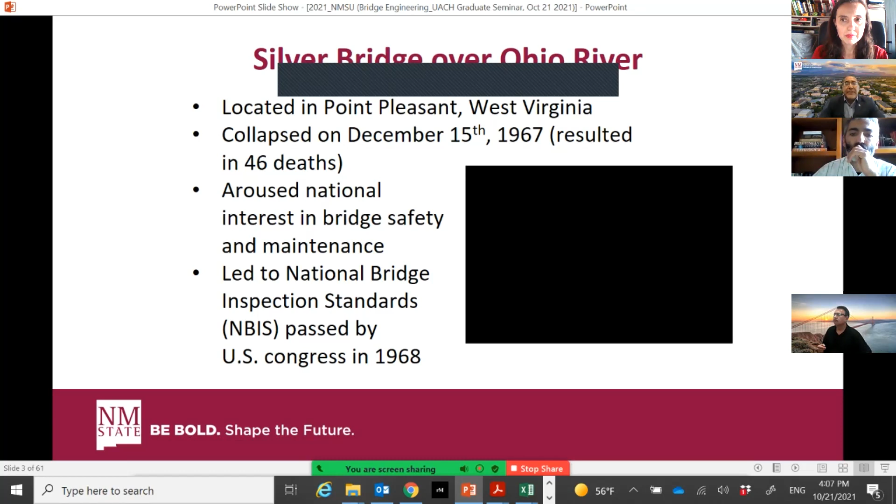To get things going, I want to first tell you New Mexico State University has been involved with bridge engineering for many years. It actually started in the late 1960s and early 1970s. My mentor was actually Dr. Kenneth White, and Kenneth White came to New Mexico State University at about the same time there was a significant bridge failure. This was in West Virginia, the Silver Bridge over the Ohio River. To let you see what happened during this particular failure, I'm going to show a short video. So let me go ahead and show that.

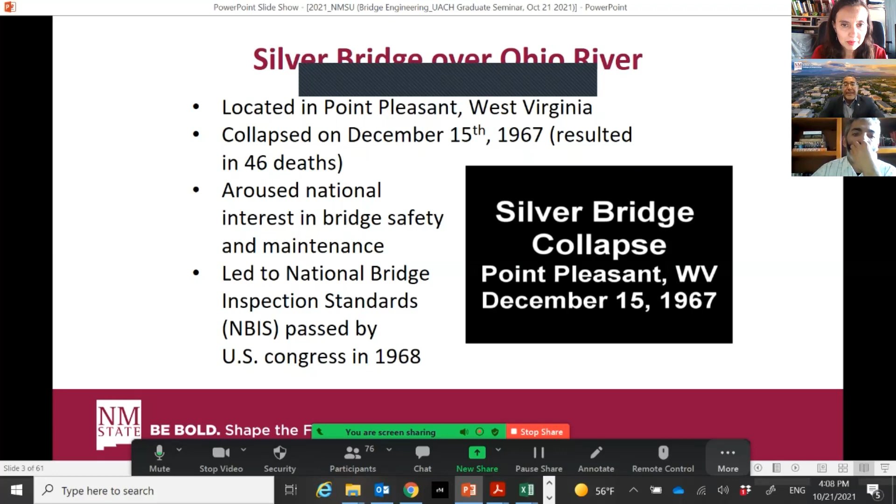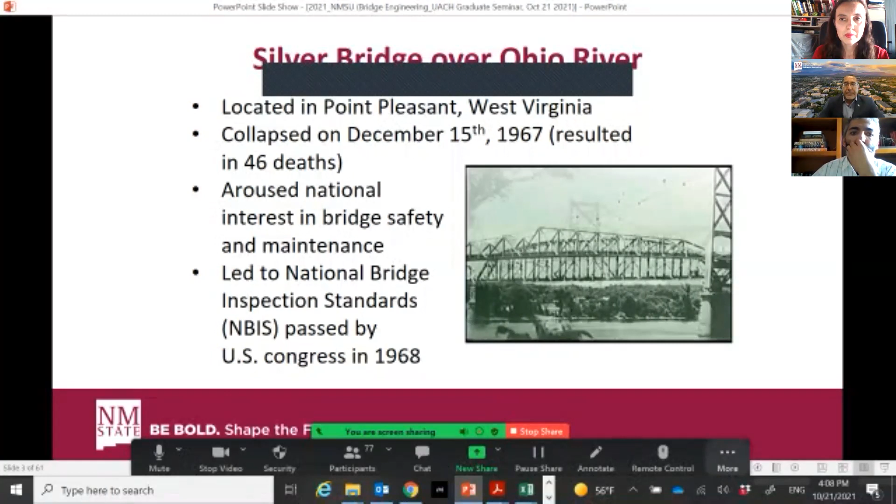The road hung from a simple, elegant chain design made possible by a new type of high-carbon, high-strength steel. It made quite an impression and was known as the Silver Bridge.

If the weight of traffic had been the culprit, the long, thin shank would have broken, not the circle of the eye-bar where the steel was at its thickest. So if the eye-bar was broken just from excessive...

The bridge was falling toward me like dominoes. And by the time my car did stop, my wheels was just right on the...

31 cars and trucks fell into the river. Charlene's car hung precariously on what remained of the bridge. It was the worst road bridge disaster in U.S. history. Across the Ohio, near the town of Point Pleasant, they say, with a heavy load of traffic, it began to swing and sway. It had been photographed as they took it out.

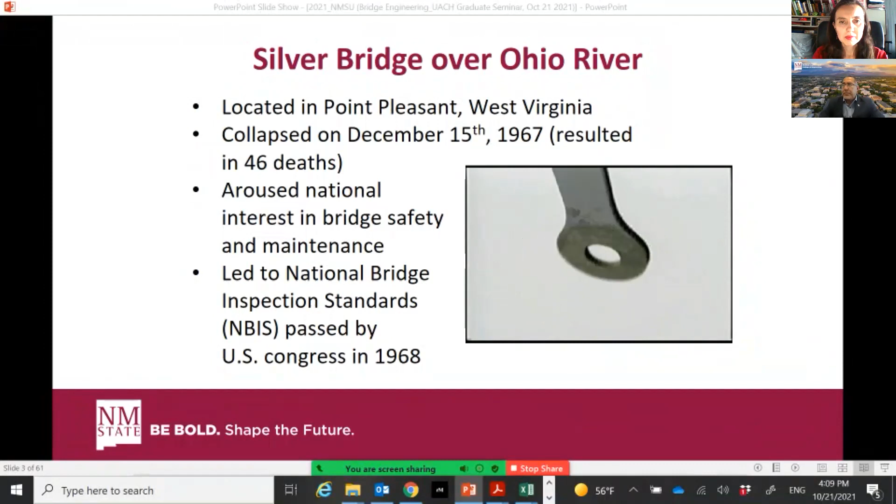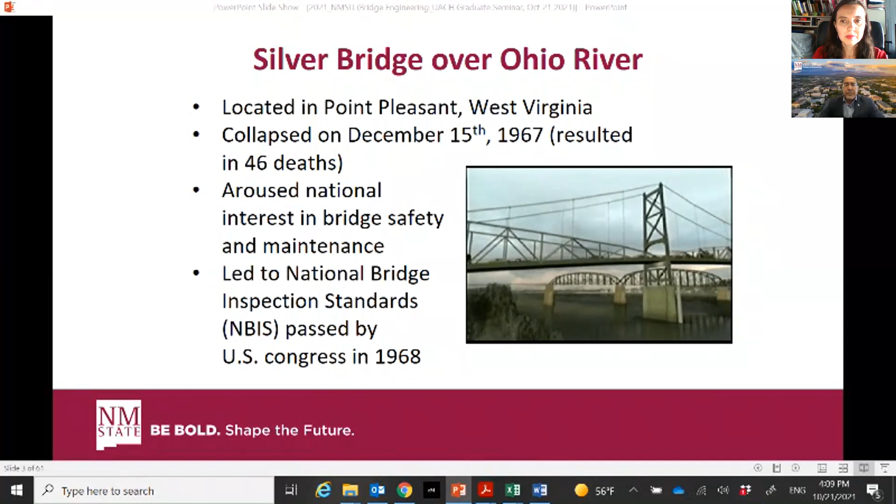This is the broken eye-bar. Each eye-bar was a link in a kind of giant bicycle chain. The massive linking circles were at either end of 50-foot-long shanks that held up the bridge, but the tiny, undetected crack caused a single link to fail. When the chain on one side of the bridge snapped, the other chain could not take the weight of the bridge, and down it went.

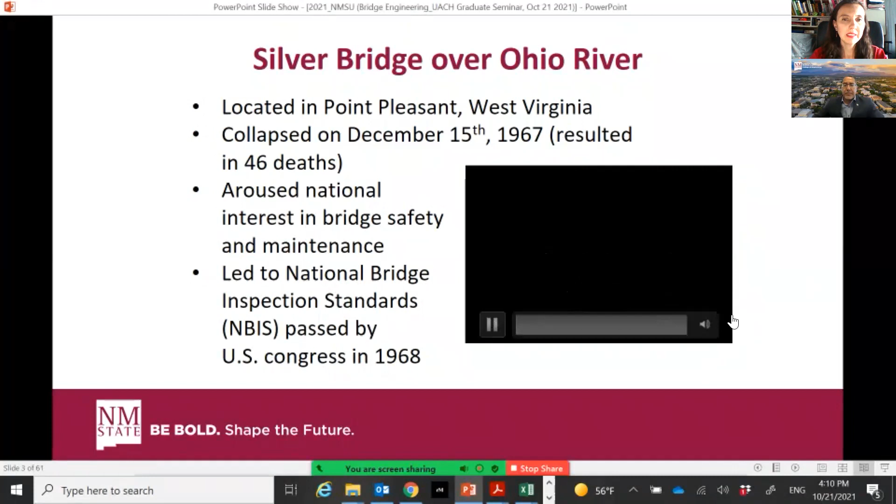Okay, so that was a video of the Silver Bridge over the Ohio River, and you could see that it resulted in 46 people losing their lives. And because of this failure, in the U.S., they started the National Bridge Inspection Standards, which are related to safety and maintenance of bridges.

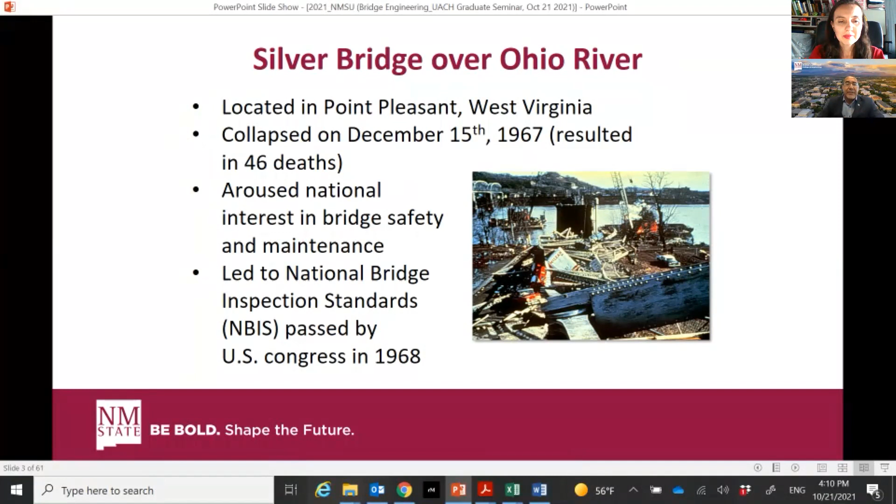So once this started, New Mexico State University began working with the New Mexico Department of Transportation, and now we are a university that actually conducts bridge inspections for the state of New Mexico, which is a very unique program because we hire four undergraduate students every six months, and they're the ones that actually help with the inspections.

So it's only one of its kind in the US, and it provides experiential learning co-op experiences for our students.

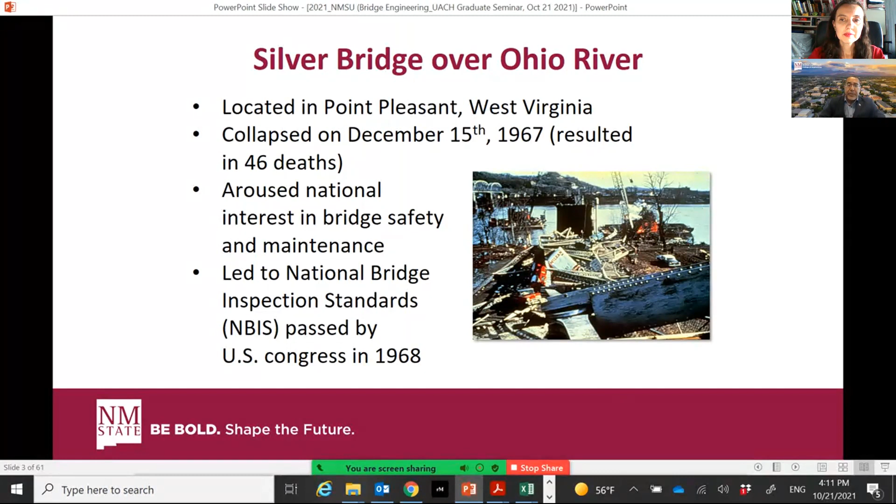A couple of other failures I wanted to talk about: there was the Sunshine Skyway Bridge in Florida in 1980. That bridge failed due to pier protection — the bridge was hit by a barge.

Then we had the Mianus River Bridge in 1983 in Connecticut. This was a fracture critical bridge, in which, much like the Silver Bridge, if one of the components happens to fail, the whole bridge will collapse.

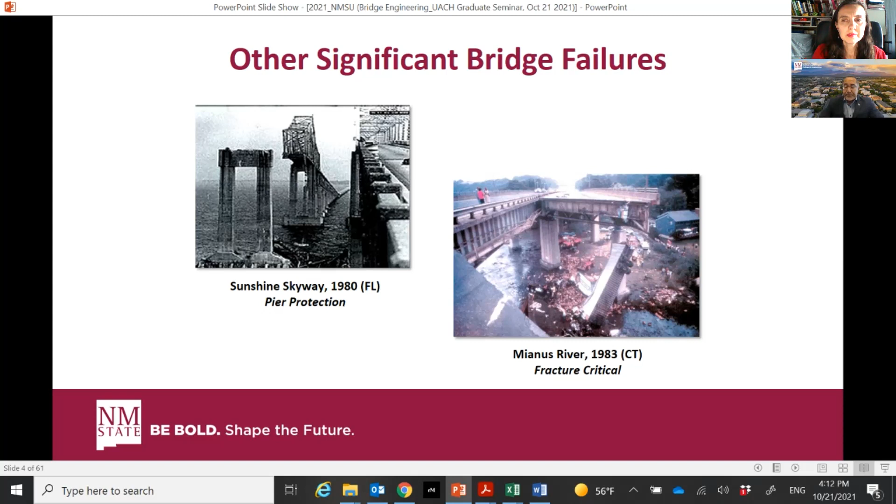We also had the Schoharie Creek Bridge in 1987 in New York. This bridge failed due to scour and undermining — this is where water gets under the structure and starts to remove the soil from underneath the piers and the abutments. This is a very common problem in areas where there's a lot of rainfall and flooding.

And then most recently, we had the I-35W interstate failure. This was in Minnesota in 2007, and this particular bridge failed because of the condition of the gusset plates. So all the different provisions from the US have changed because of these failures.

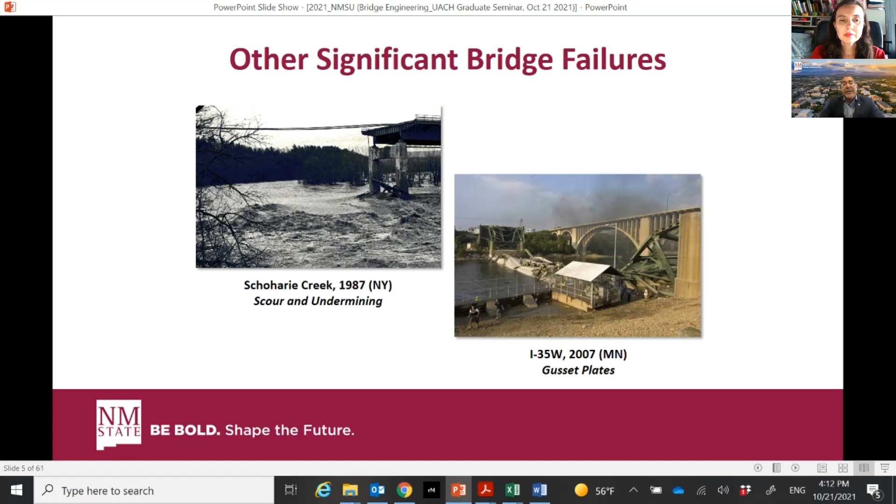This gives you a progression of all these bridge failures, starting off on the Silver Bridge, moving on to the Mianus River, I-35W. And then in 2013, there was a bridge that failed in Washington over the Skagit River, and that was because a vehicle hit the bridge — it hit a truss bridge and the bridge collapsed.

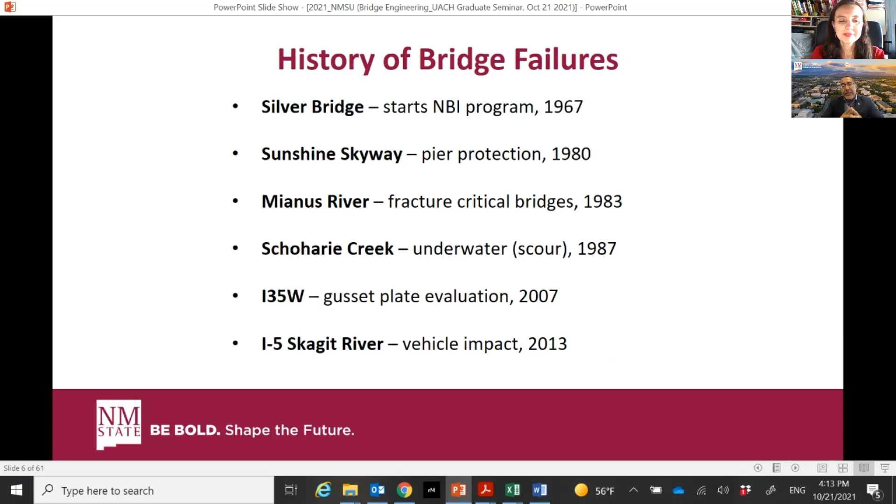So anyways, I like to give that introduction because our work at New Mexico State University focuses on inspection and evaluation of infrastructure. We do a little bit of design and new construction, but a lot of our research has to do with evaluation. So what I just talked about here is the inspection and rating of highway bridges.

Like I said, we've been doing this since 1967. We also move into the area of higher level evaluation of reinforced concrete slab, steel girder, and pre-stressed concrete girder bridges. What I mean by higher level evaluation is we're looking at three-dimensional modeling and also load testing of bridges, which I will talk about in more detail here in a few minutes.

We also have projects related to the retrofit of bridges using carbon fiber reinforced polymer materials, load rating and fatigue evaluation of railroad bridges, and riveted connections of steel arches.

This is a project that we did for the Los Alamos National Laboratory, located in Los Alamos, which connects the city of Los Alamos to the lab.

Another area is ultra high performance concrete for pre-stressed concrete bridge applications. We've been looking at concrete strengths ranging from a typical concrete strength of about 10,000 pounds per square inch, while the concrete we're producing at New Mexico State is double that, around 20,000 pounds per square inch. That's the material we're using for bridge beams, and we're also using that material for overlays of bridge decks.

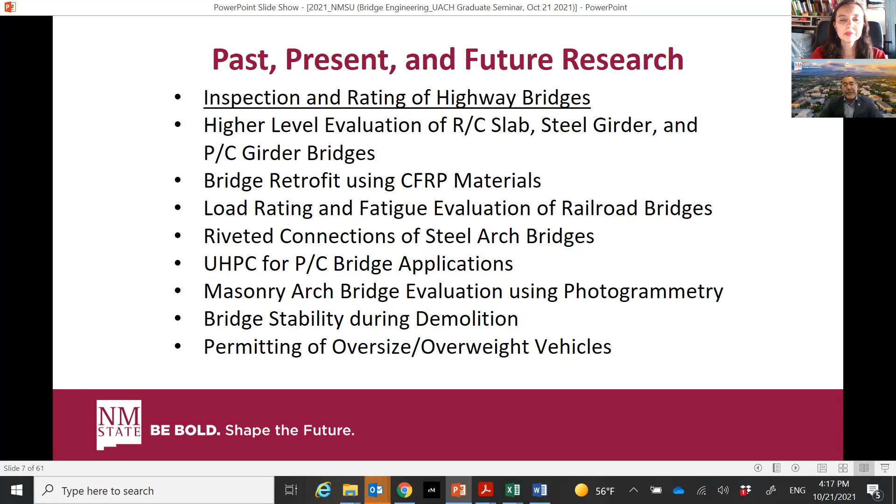We're coming up with a fee structure. We will need to charge these vehicles so that we could basically retrofit, rehab, or replace bridges in the New Mexico area.

So let me briefly talk about the bridge inspection program. I'm the PI for this project, as I mentioned. We have a program coordinator, two team leaders, and four co-op students that participate every six months. So over a given year, we have eight students that participate.

I like to mention this program because if you're a student from the University of Chihuahua and you happen to come to NMSU, you can participate. In fact, I have a couple of people interested right now, and you would be hired for six months and be able to get some experience, which would be very useful for future employment.

We inspect about 400 bridges every year, including fracture critical bridges, such as the one you saw in terms of the collapse. Right here you can see the Taos Gorge Bridge. We inspect that bridge every 2 years, and we just finished inspecting it. It's 600 feet above the ground level, which is very high, and it requires that we use climbers. We have an underbridge access unit, and you can see people here inspecting the structure and getting ready to go down underneath it.

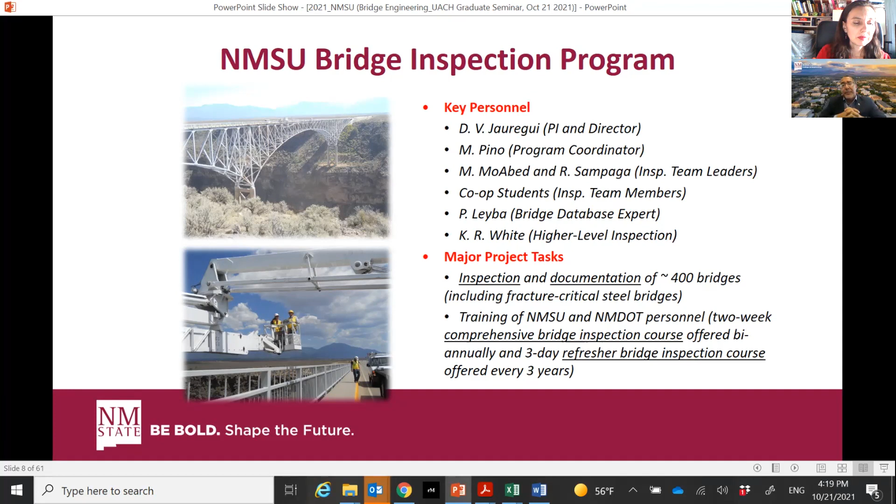To give you an idea of the bridge inspection side, we look at each bridge component and assign a condition state. Condition state 1 is good, 2 is fair, 3 is poor, and 4 is severe. Our students and engineers go to all bridges and collect this information. The New Mexico DOT uses it to plan their funding—for example, if a bridge component has a lot of area in condition state 4, they would decide to replace the bridge deck.

We have to inspect bridges every 2 years, so each one of our bridges is inspected on that cycle. This area of work is very much related to forensic engineering, where you're evaluating infrastructure and making sure it's safe for the public.

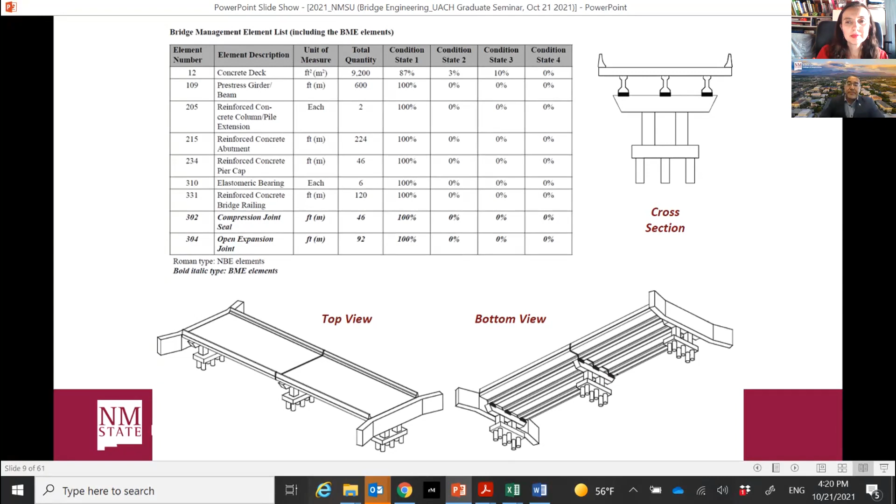The next area I'm going to talk about is our bridge evaluation program. It essentially involves coming up with a capacity of infrastructure, so we could set limits in terms of how large the loads can be that go over our bridges. The one I want to talk about today is called the load rating of pre-stressed concrete bridges without plans, and it involved load testing and non-destructive material evaluation. I'm going to focus on pre-stressed concrete bridges, but we also did reinforced concrete, steel, and timber bridges, including field visits and as-built plan development.

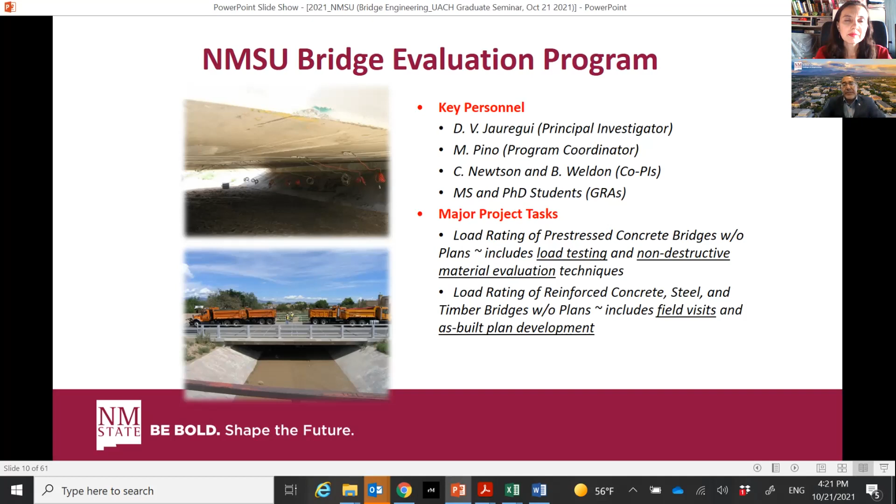The bridge testing equipment we use, these are sensors that we attach onto the girders. This is a product we've been using for many years, a structural testing system provided by a company called Bridge Diagnostics Incorporated, and we work very closely with them. One of the recent articles that came out has been related to this particular project.

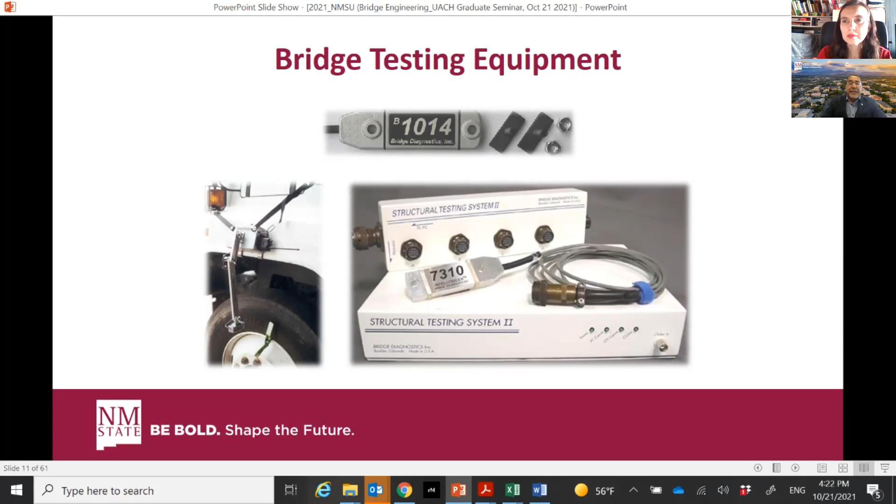So let's go ahead and get into that project. This is going to be the evaluation of pre-stressed concrete bridges without plans—evaluación de puentes preforzado sin planos.

Let me talk about the introduction. Right now in New Mexico, bridges without design plans are a major issue. Approximately 10% of bridges do not have design plans. In the US, there are over 600,000 bridges throughout the whole country, so of those 600,000, 60,000 do not have plans. It's very difficult to determine the capacity.

Many of these bridges are older, what's called off-system—they're not on the interstate. They're owned by a city or a county, and the bridge plans have just disappeared. This is a challenge: how do we determine the capacity? We can't do an analysis because we don't know the concrete strength, we don't know the rebar, there's a lot of things we don't know. So we did this project for the New Mexico DOT to come up with a plan so they can evaluate these types of bridges.

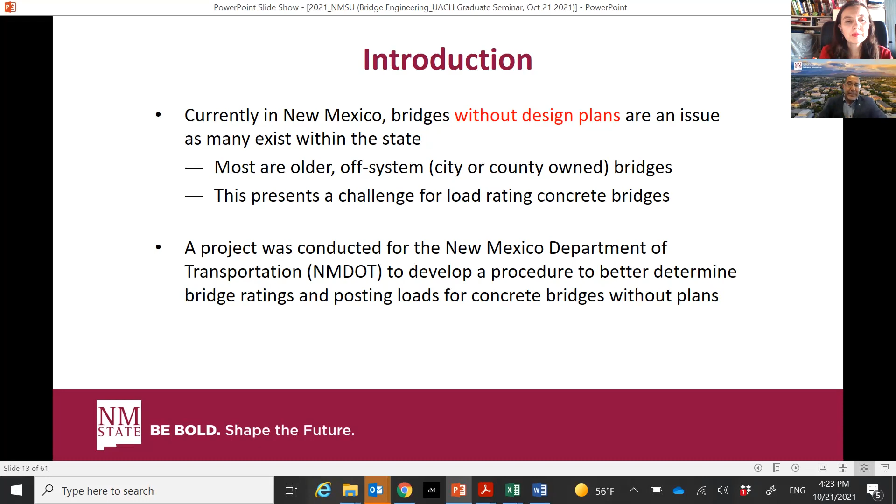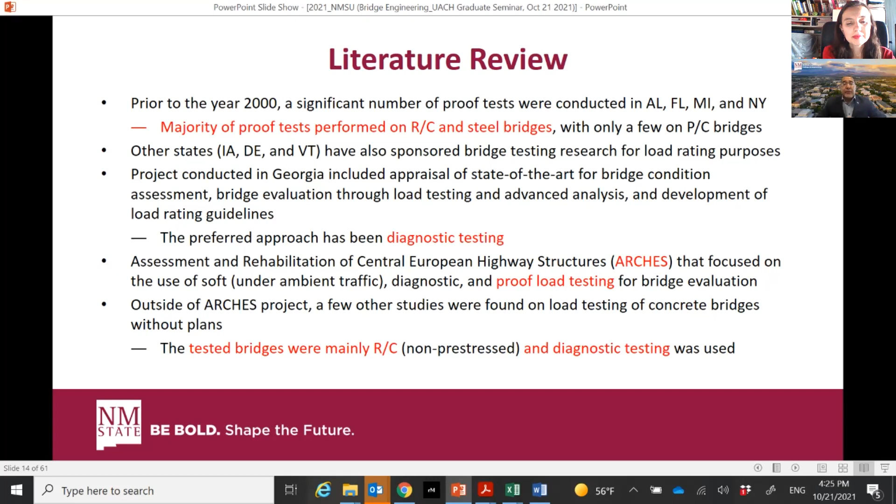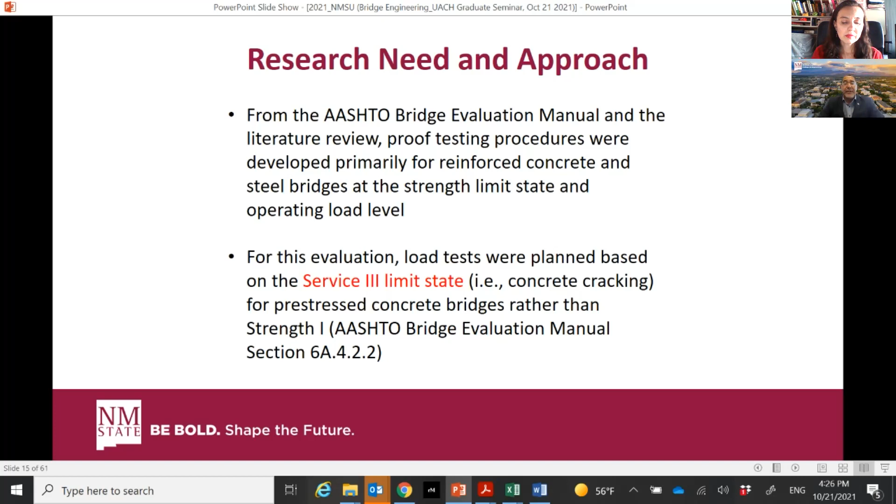And we're going to be looking at Service 3 limit state. This relates to concrete cracking, as opposed to using the Strength 1 limit state. So we're going to be looking at Service 3.

So once again, we don't know what the strength is of the concrete. We don't know if there's rebar, we don't know if there's pre-stressing strand. All of that is unknown information.

And these bridges are very common in Las Cruces because there's a lot of agriculture. So in order to get over some of the channels, what they'll do is go find some old beams and just span it over the channel - they won't even really design the bridge. It's just old beams they're trying to salvage and use as a bridge.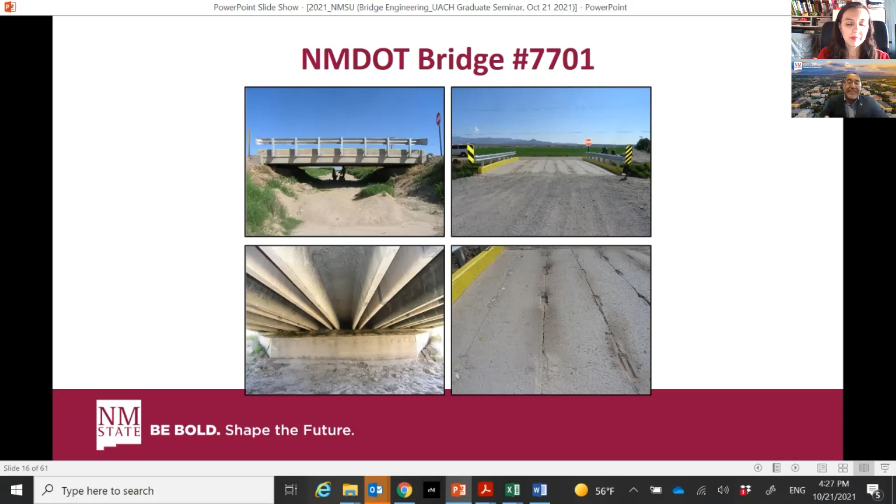So once again, you can see now what the challenge is. What's the capacity of these bridges?

So to give you a summary of what the bridge looks like: it's single span, pre-stressed concrete, 31-foot spans. The shear keys located on top of the beams are damaged, as I mentioned before. The good thing is there's no flexural cracking on this beam.

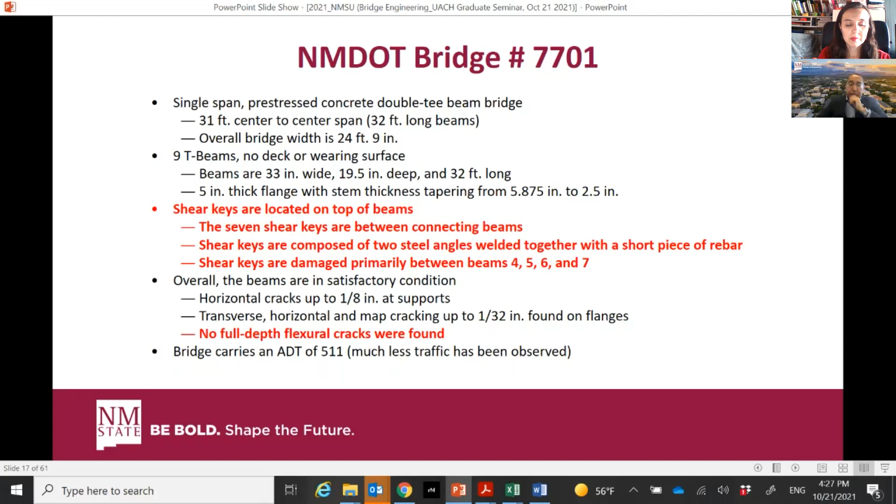And so now we can proceed to evaluate the capacity. The basic procedure we followed is using what are called Magnel diagrams. This is to determine the relationship between pre-stressing force and eccentricity of the pre-stress force, and the pre-stress force itself.

We also used a rebar scanner to detect the steel so we could get an idea of what type of reinforcement is in the beam. We then did a diagnostic load test, and used that to plan a proof test. On the proof test, we put many trucks, up to 4, to show that the bridge can carry a prescribed amount of loading.

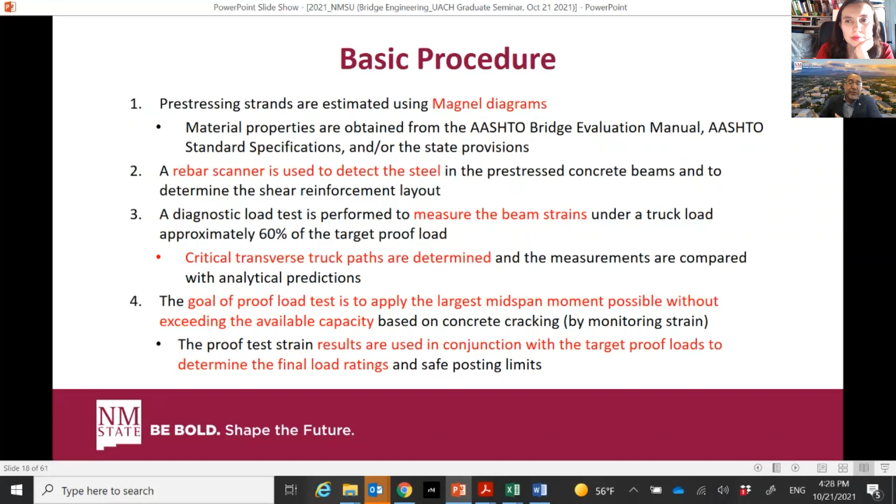So on the estimate of the pre-stressing strand, these are the equations we used. If you look at P1 and P2, those have to do with the requirement for pre-stressing stress at release - the amount of pre-stress we need and the limit state associated with transfer of the pre-stressing strands. This is when the strands are cut in the yard, in the precasting yard, and we want to make sure it does not exceed the allowable stress.

So here, the only thing we have is what's called the pre-stressing effect, and then we have dead load. The dead load moment is the only thing we're looking at in these first 2 equations. This one is related to the bottom flange stress, and this is the top flange stress.

P3 and P4 are related to service loads. So now you have moment total, which includes dead load plus live load, and then you have a K factor, which is related to pre-stress losses. We now have to calculate the pre-stress losses in the service condition. So those are the general equations we used.

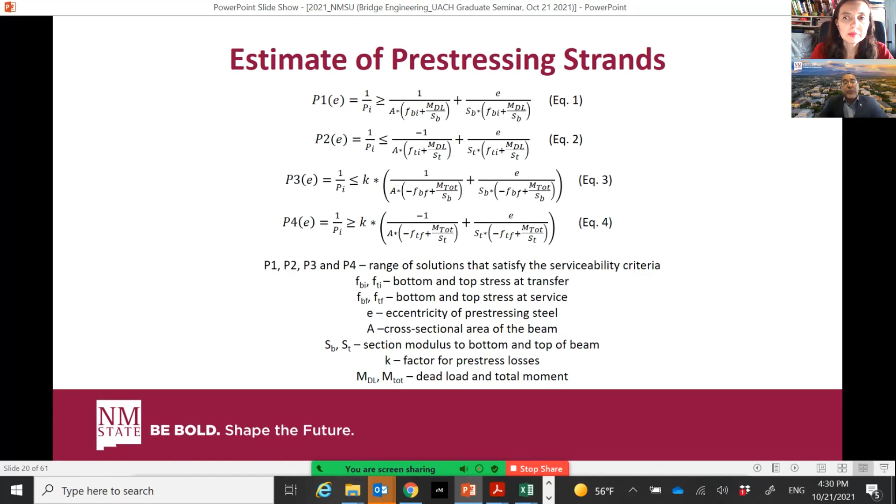All right, so you can see the different lines here. You have the force in the pre-stressing, and you have the eccentricity, and those are the 4 lines. The blue line represents at release, the red line, and then the green and purple are at service.

This area that you see is where you have satisfactory design. If you look at the top point, that represents a low pre-stressing effect, high eccentricity, and the bottom point represents high pre-stress and low eccentricity.

Most bridges are designed for the low pre-stress and high eccentricity - really what you're doing is putting the strands as far as possible from the center of gravity, so you have a larger lever arm, and then you lower the amount of pre-stress you need. And you see here that this was developed for the H20 design truck.

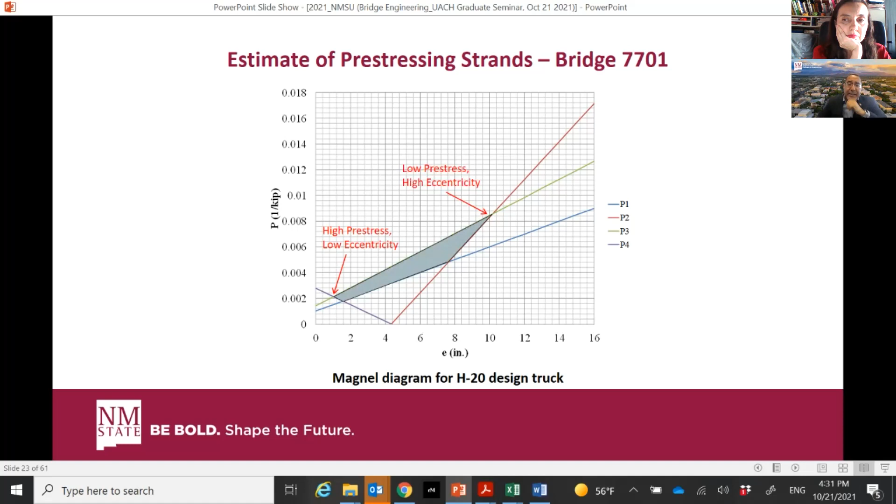All right, so these are the results. What you see here in the yellow area is the low pre-stressing effect. It showed that I needed to develop about 116 kips of force, okay? And the number of strands is going to be about four strands, and the eccentricity is about 10 inches. So this is just an estimate.

What we're showing here is that we need 4 strands for the H20 load, and then for the HS20 and the H15, you needed 5 strands and down to 2. So what we're thinking is we need between 4 and 6 strands, okay? So that's the amount we're expecting to show.

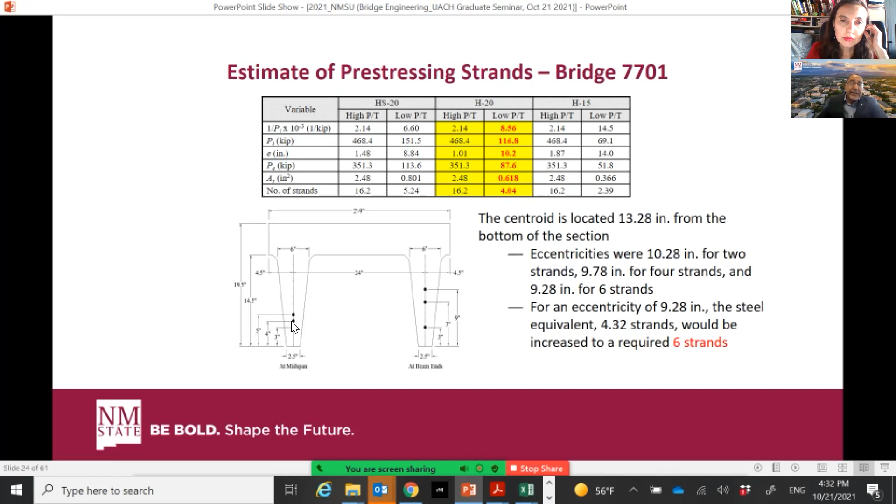And what we were able to do is estimate how many strands you need. So you need 6 strands, okay? You have 3 over here, that's at midspan, so it's going to be located towards the bottom, and then 3 at the end, and they're harped, okay? And that's to control the end stresses.

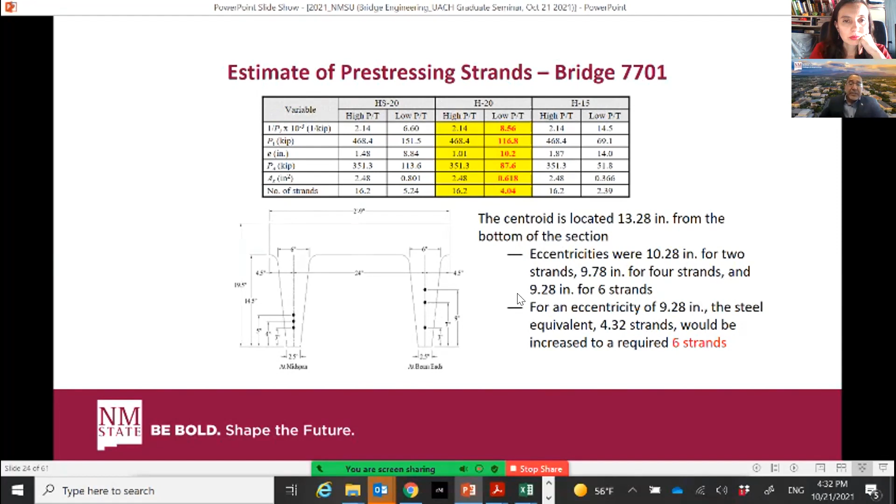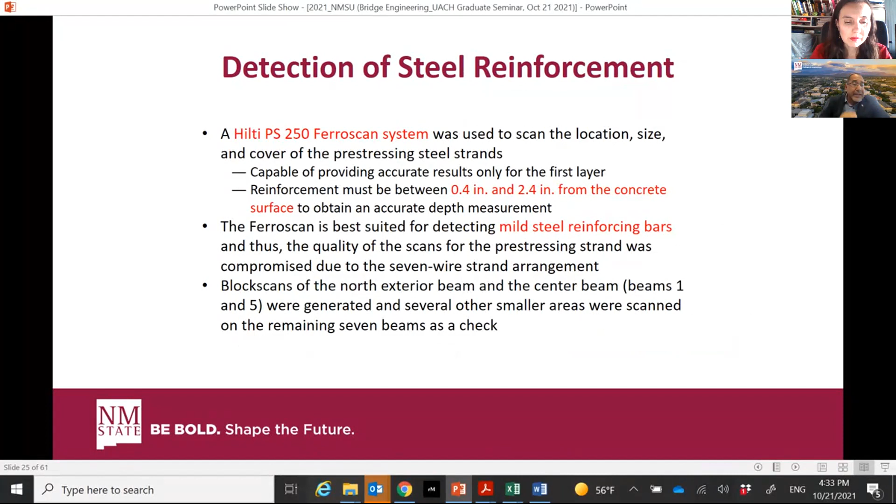So in order to verify this, we used a Hilti PS250 ferroscan. What this is able to do is scan for rebar, okay? And we're also looking to see if we can use it for pre-stressing strands. One of the limitations is that the reinforcement must be between 0.4 and 2.4 inches from the concrete surface. And it's mainly for mild steel reinforcing bars, not necessarily for pre-stressing.

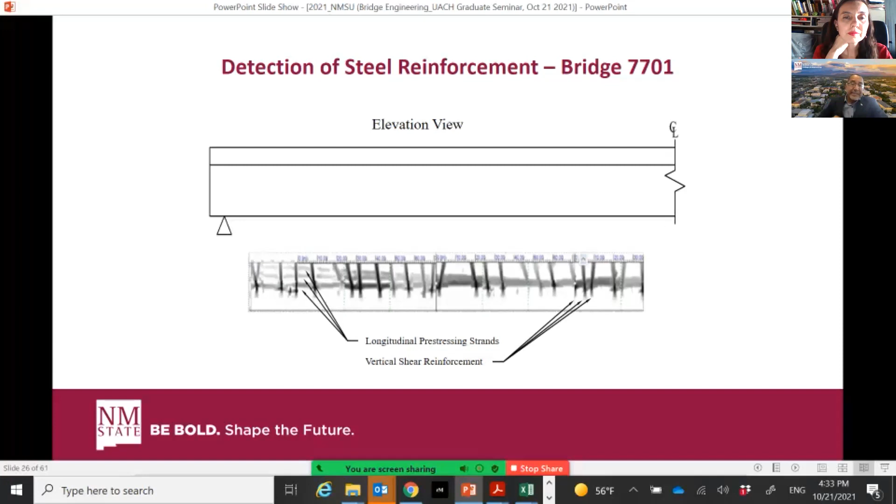All right, so now that we know what the beam looks like, the next thing we did is we figured out what is the cracking moment. What we wanted to find out is how much moment, and therefore how much load, can we put on this beam before it cracks, okay? Because the beams are not cracked, and we don't want to crack them when we go and do our load test.

So we need to come up with an estimate of what that cracking moment is. All right, and here it is right here. This is the formula we use. We have the section modulus, effective pre-stress, the area of the cross section, eccentricity, and then the cracking stress, the modulus of rupture.

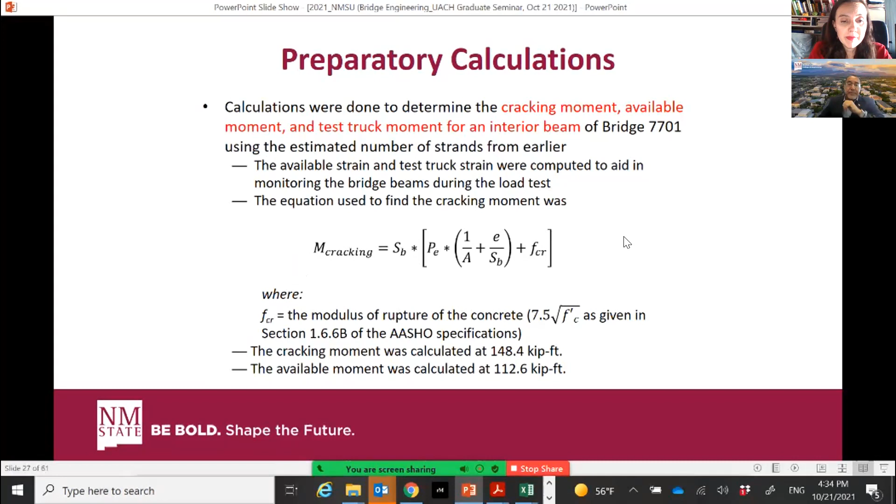Okay, I'll go ahead and skip this one. So this is the estimate of the cracking moment. Here is the cracking moment, 148 kip feet. Our dead load moment, this is the weight of the beam itself, that's the moment caused by the dead load. We get about 36 kip feet. So that means we have about 113 kip feet before the bridge cracks, okay?

And what we're anticipating is that the moment due to the truck is going to be causing about 42 to 93 kip feet, okay. So that means that we're not going to crack the beams. So we have to convert that now to the available strain, which is about 530 microstrain. And this is what we're expecting as far as the truck.

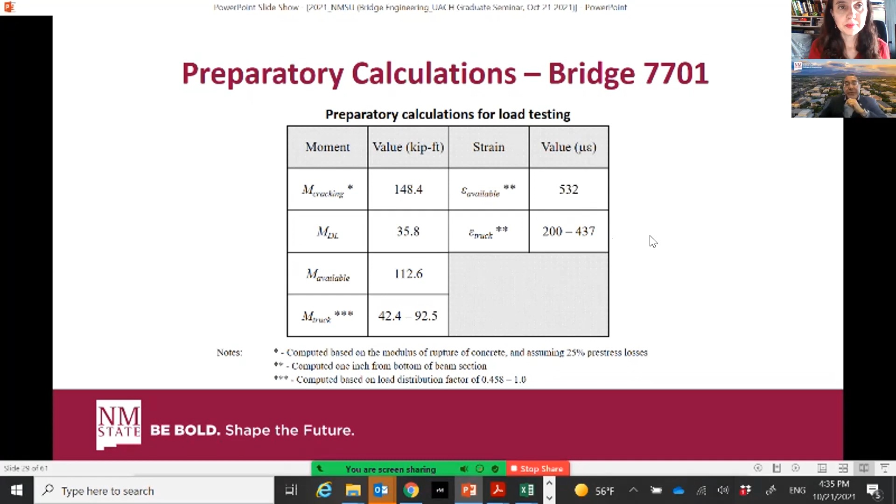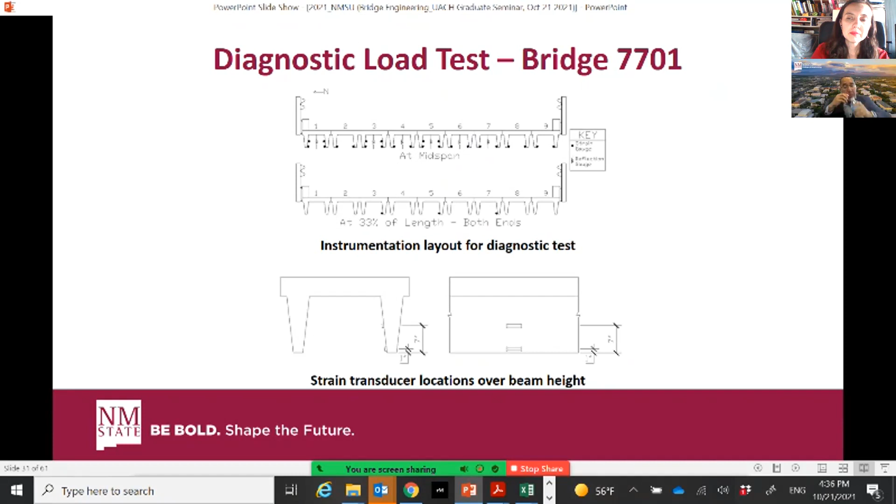So now we're looking at the cross section, and this is where the trucks are going to go.

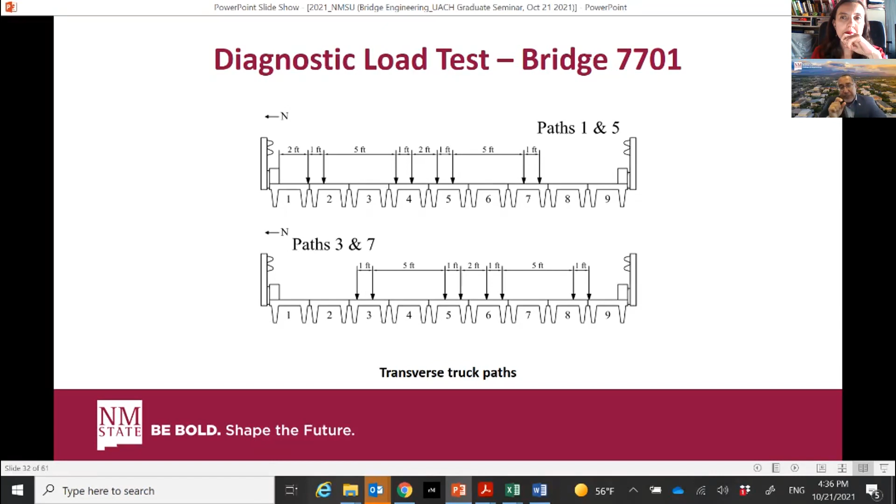Okay, we have 2 trucks that we're going to put on the bridge, and we're going to make sure that we check how much strain is being measured by the sensors. When we first did the test, the available strain was about 530.

That means if we exceed 530, we're going to crack the beam. The largest one we got was on one truck path, 200 microstrain, 150. With 2 trucks, we got 265, and then we got 312.

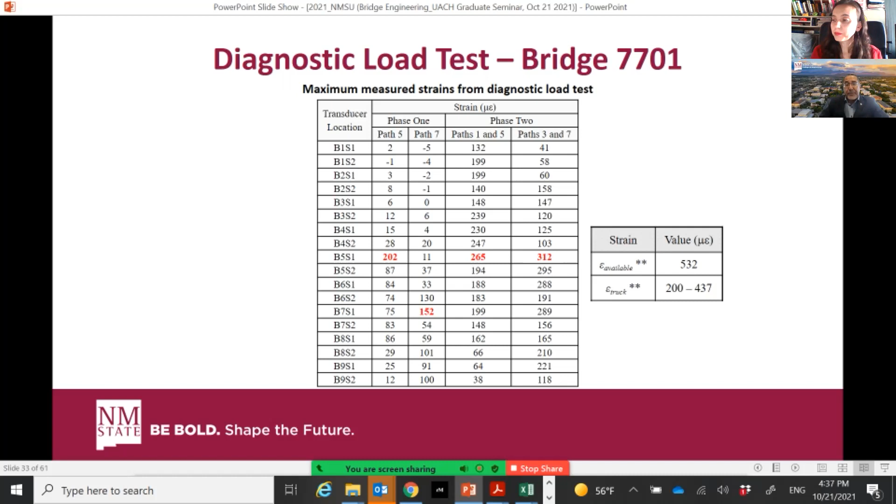So that is below 532, and sure enough, we did not crack the bridge. Now we can move on to the proof test, where we're going to put 4 trucks. This is the proof load test, and we changed the instrumentation a little bit because right at this location, all the connections were damaged. We damaged those connectors, or it was already damaged, just due to use of the bridge.

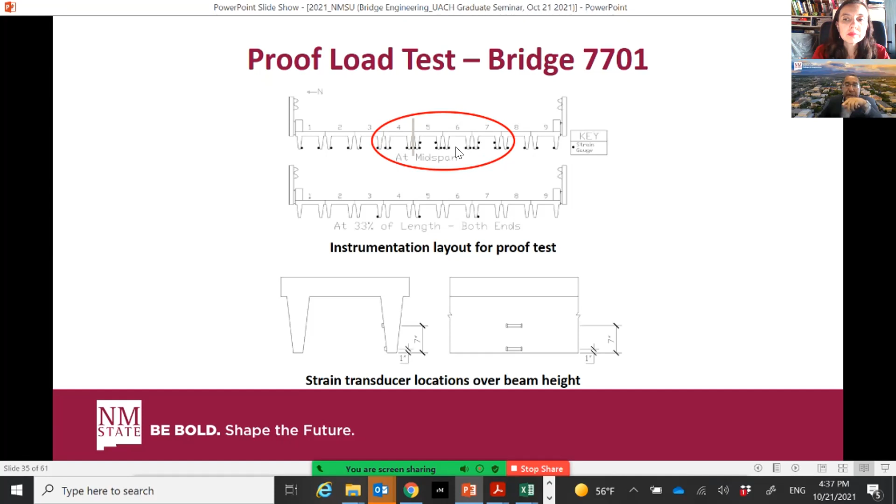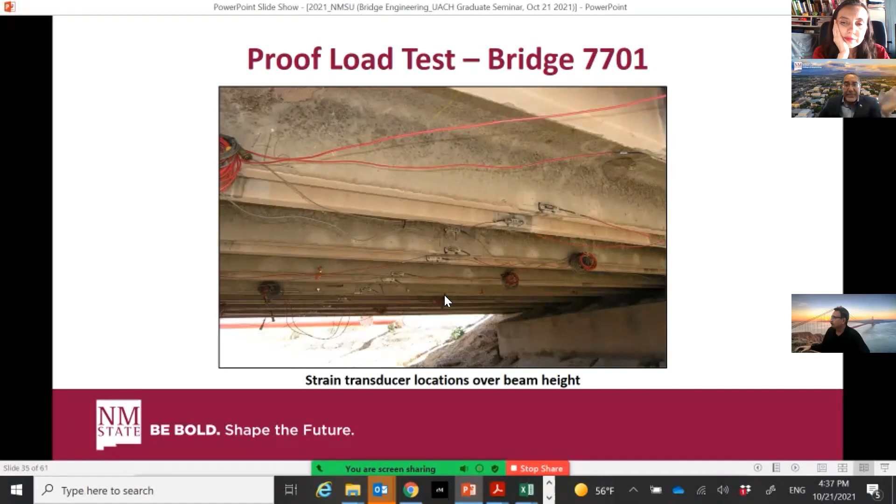Notice how we have a lot of sensors right in this region because we don't want to exceed the available strain there. What you see here is just the bottom side of the bridge, and you can see the sensors—one here, one here, over the height of the cross section—and we're looking at strain all across the width of this bridge.

Before we did that, another thing we had to do is make sure the bridge would not crack due to shear forces. Under our truck, we were expecting a maximum shear of about 26 kips, and our shear capacity, according to this equation, a web shear cracking force, is about 27 to 42 kips. So it's not going to crack due to shear. However, we might still crack under flexure, and that's what we're going to check.

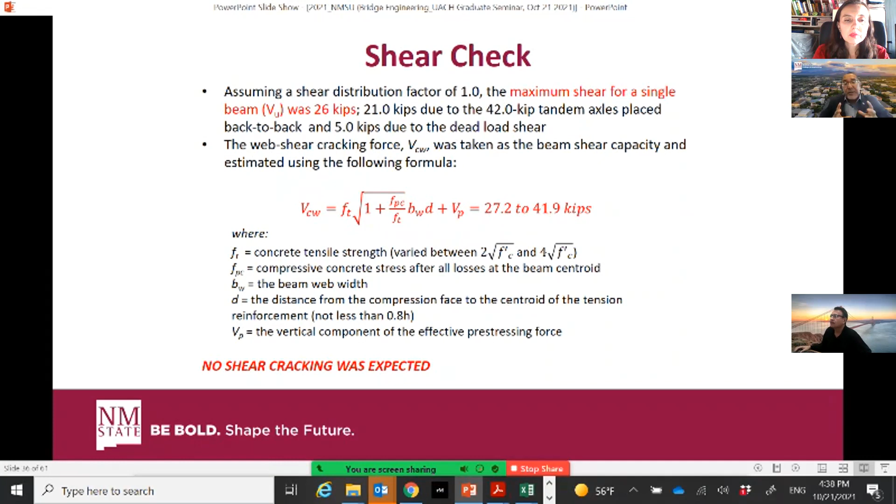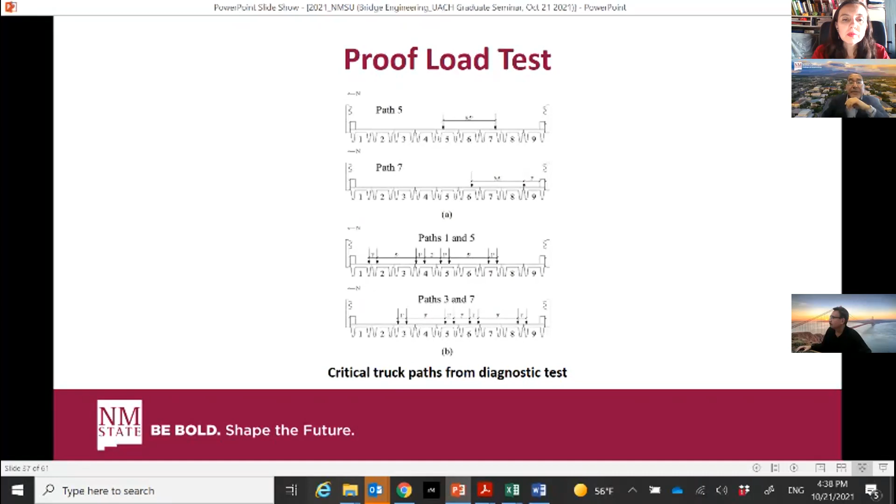So these are the truck positions. Let me go ahead and show you. We have the trucks backing up at this location. This was with 1 truck. This is with 2 trucks back to back.

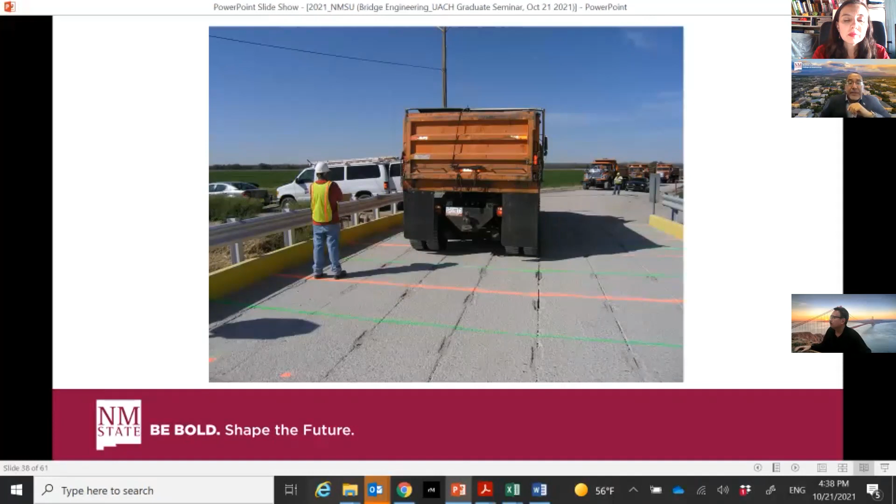And see, you could see right here the crack—there's a failed connection. So basically you have 2 halves of the bridge acting independently. They're not connected, so we had to be very careful not to exceed that strain on the bottom.

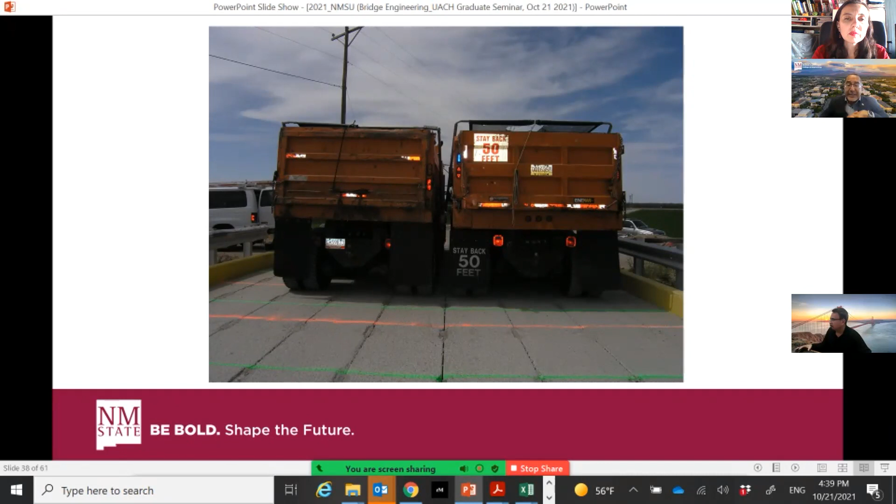Here's 2 back to back now. So if you look before, these are side to side. Now we have it back to back. And now we have 4 trucks, back to back on this span. That's a lot of load—this is the most load that this bridge has ever had. So again, we wanted to make sure that it didn't fail.

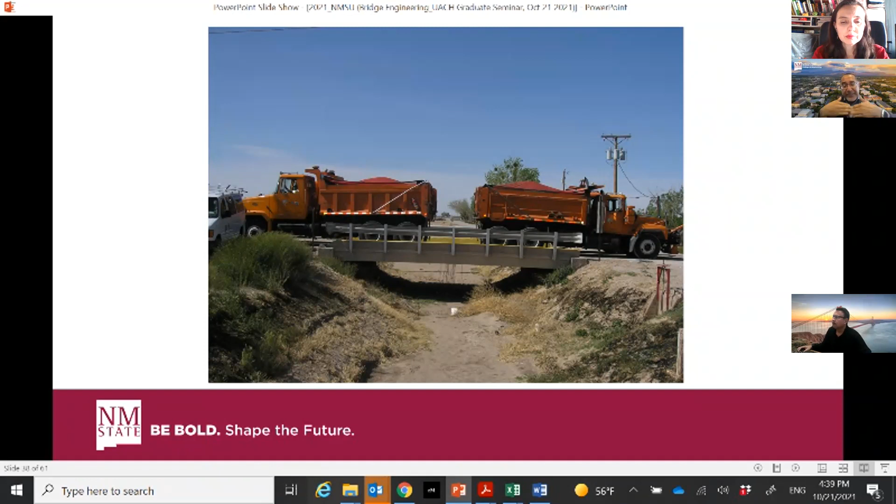And these are kind of how we did it. This was with 1 truck. This is with 2 trucks back to back in just 1 lane. And then over here we have 2 trucks, and then we have 4 trucks. We tried a lot of different loading arrangements.

And this is the amount of strain we got. You could see our available strain was 532, and look at how close we got—528. That means if we don't stop the truck, it's going to crack the bridge. So we stopped it.

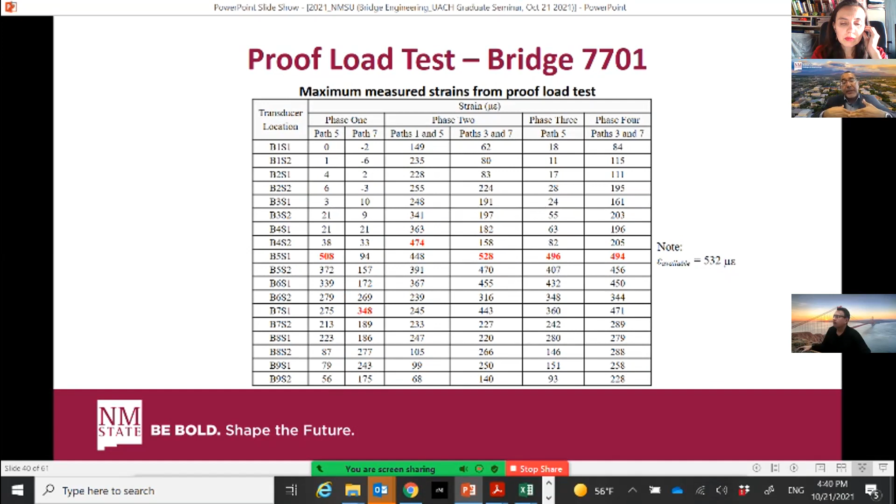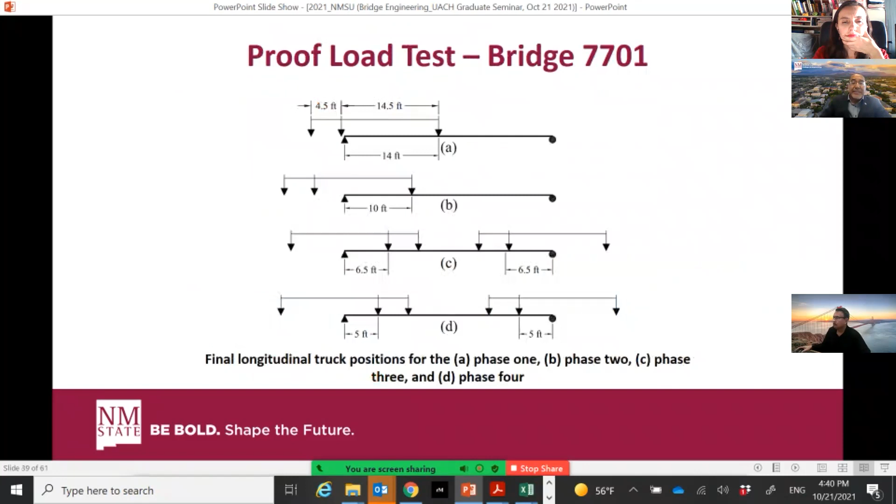That's the reason, if you look back here, on this first one we took the truck all the way to 14 feet. Here we did only 10 feet. We could not take it all the way because we had 2 trucks on there, and we'd fail the bridge. You could see different truck arrangements, and that's the reason we had to stop the truck from going any further.

All right, so now we've stopped the trucks. We know how much load was on the bridge. So now we can come up with a load rating, and we had to come up with a moment equation, which is the target load. And you have this adjusted target load factor.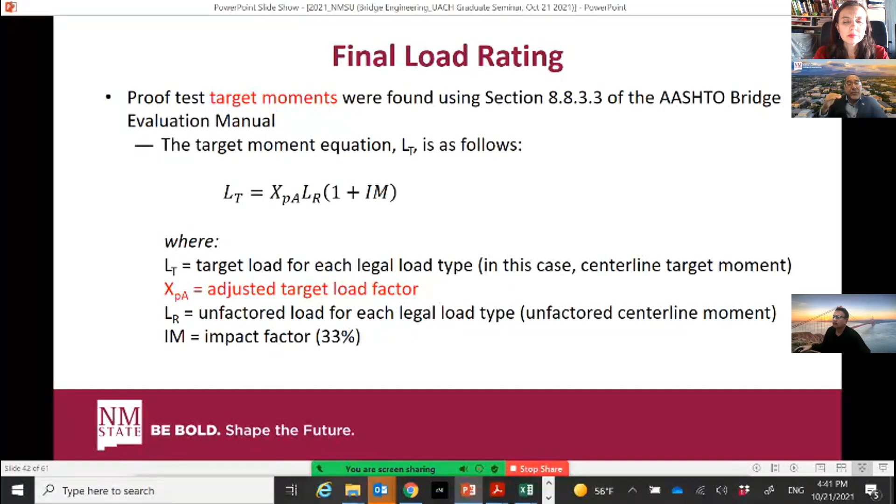We have different types of legal loads, some specific to New Mexico, and some specific to the Federal Highway Administration. This equation predicts the level of load that we need to put on the bridge to prove that it could carry the legal load.

Then we have some adjustment factors. We have to adjust the load. If we have one lane loaded—remember we showed 4 different load configurations, 2 were one lane loaded, 2 were multiple lane loaded—so for one lane loaded, we have to increase that target by 15%. If it's non-redundant, that's another 10%.

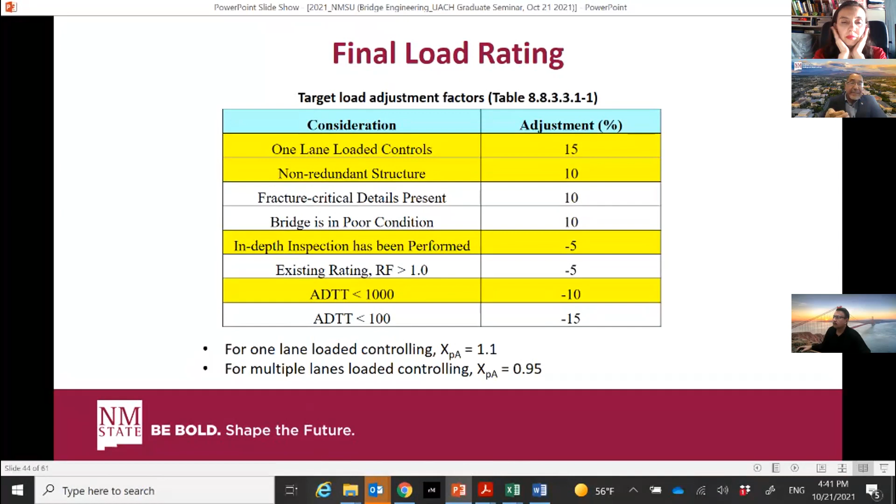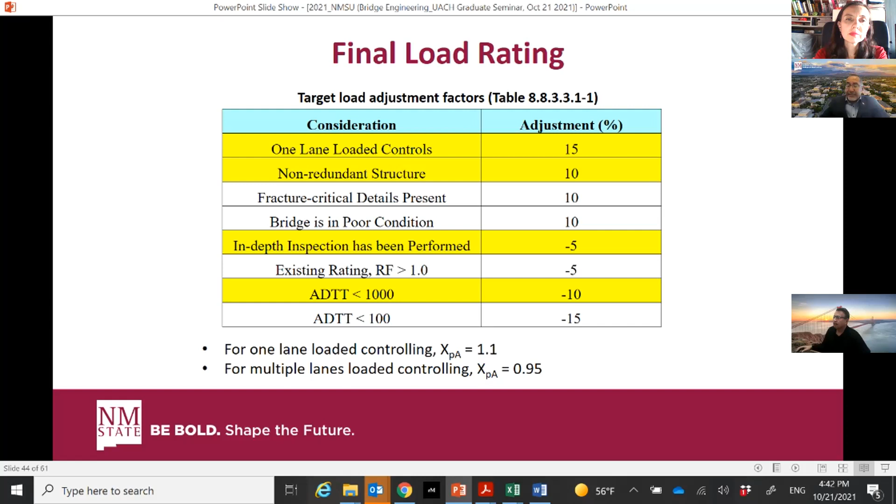We said it was non-redundant because the bridge girders were not connected, so one beam could actually fail. We did an in-depth inspection so we can reduce the amount of load by 5%. And the average daily truck traffic was less than 1,000, so we can reduce it another 10%. These are the adjustments that resulted right here.

Finally, the final rating is the rating factor for operating, which is the largest load you can put on the bridge. We have the actual test moment applied by the trucks, and the target. So if you placed 50 kips and the target was 40, you showed it could carry 1.25 times the legal load. Then we made a final adjustment for the safe posting load, which is how much we can actually put on the bridge.

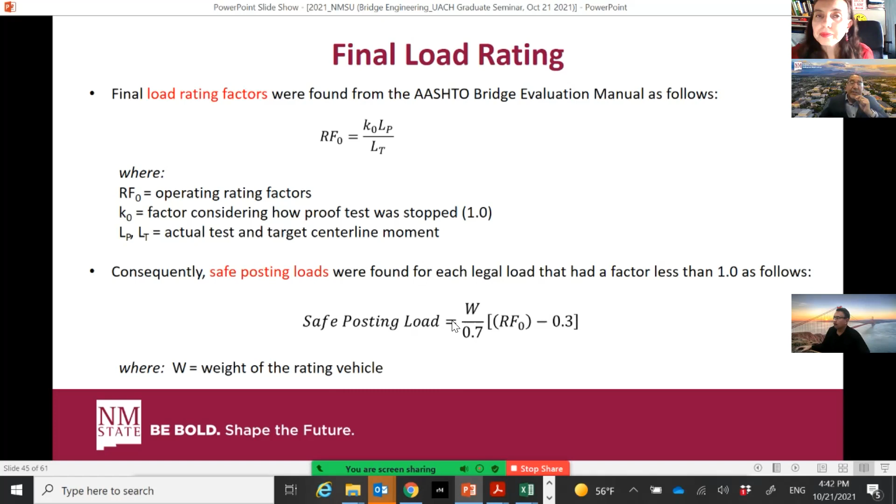So let's look at the final results. You can see the rating factors for all the legal loads we did: HS20, type 3, and these three right here are federal legal loads, while these are New Mexico legal loads.

So we now have to put a load posting sign on the bridge for these three loads and these two loads. For the type 3-3 and New Mexico 2, we did not need a load posting sign because the rating factor was greater than 1. Basically you'll have to put a sign in front of the bridge stating the load limit for these different trucks, ranging from 16.9 tons all the way up to 30 tons.

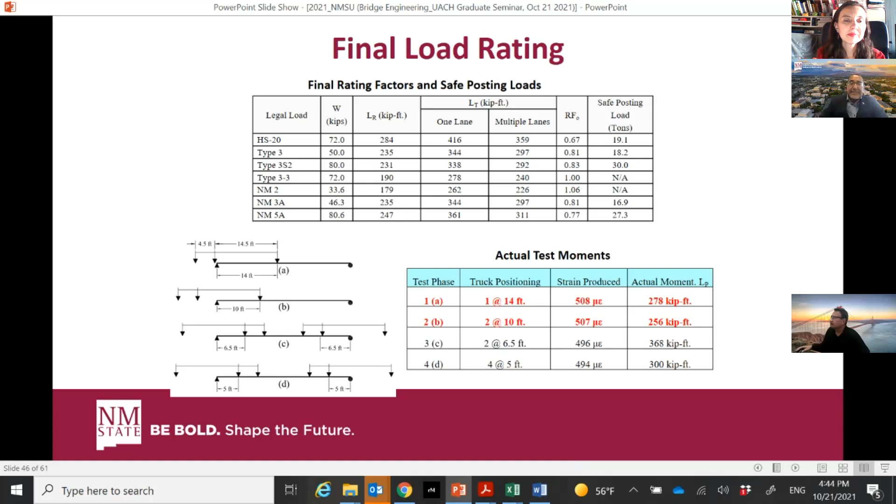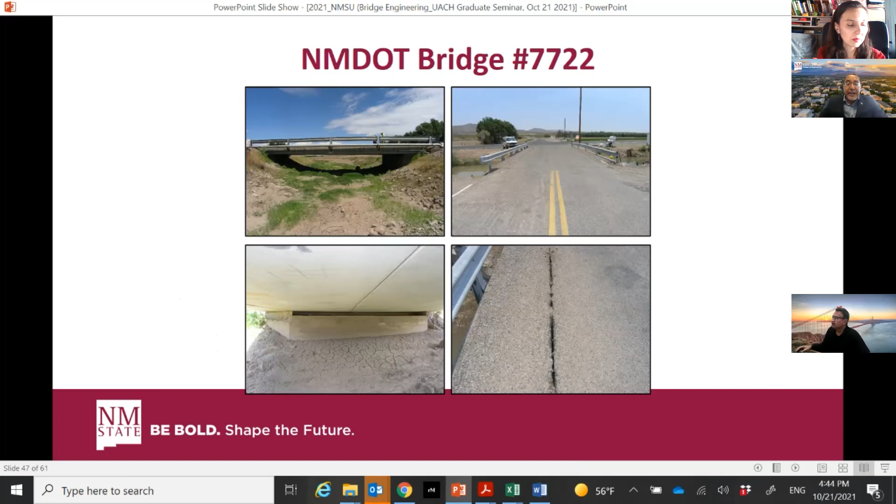So that was the study. It looks like I'm running out of time here at 4:45, but we did another test on a box girder bridge, which was very similar. I'm not going to go into the details on that. Instead I'm going to go to the conclusions so we can wrap up the presentation.

The conclusions from our study were that conducting the load test based on serviceability was used to ensure the bridge didn't crack. We used strain gauges to monitor and make sure we weren't putting on overstress. Diagnostic load tests were very useful for coming up with the proof loads, and we were able to show experimentally that the bridge could carry these loads, which was the whole idea behind the project. With that, I'll stop there and see if there are any questions.

Thank you, Daphne. I think I'm done. Are you still there? Can you still hear me? Oh, sorry, I was speaking and nobody could hear me. You might have been muted. Okay, thank you, David, for being on time. So let's start with questions.